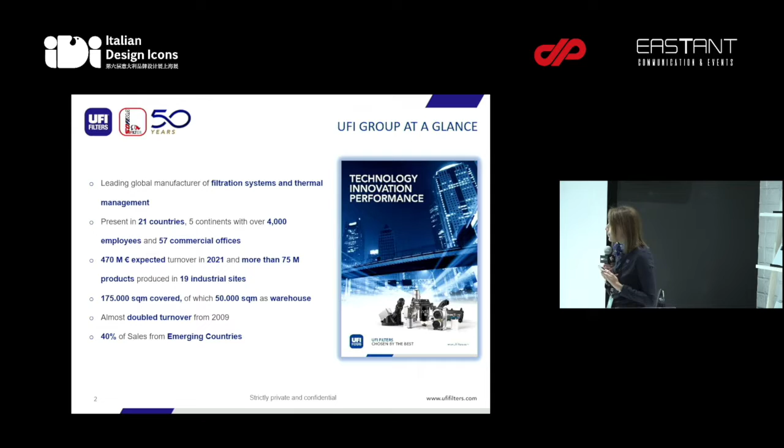Let me first of all introduce my company, UFI Group. UFI Group is a worldwide company based on filtration systems and thermal management. It was born in Italy in 1971, and now we have a presence in 21 countries, in 5 continents, and have more than 4,000 employees. We expect to close this year with a turnover of 470 million euro. And let me say that we doubled our turnover from 2009.

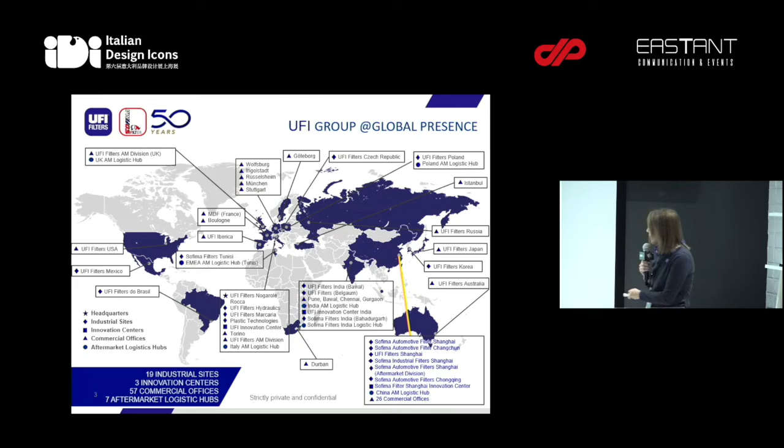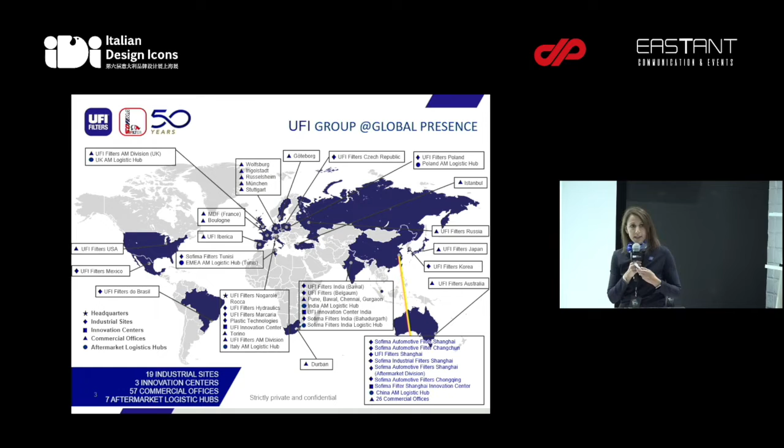This is our presence around the world. As I mentioned before, we are in 5 different continents, and we are in 21 countries. We have a big impact in APAC, and we also have 3 independent R&D centers around the world. One is in our headquarters in Italy, one is in India, and one is here in China, in Shanghai.

Let me show you our presence in APAC. In China, we have 6 production sites, and one is in Korea. And then we have a front office for our Japanese customers in Japan. We have, as I mentioned before, a very independent R&D center, able to develop our new products, with also a development laboratory that can also test our products.

Our group has 2 brands, the famous UFI Filters and also the Sofima filter brand. And we were born to be in original equipment, to be inside the car when it goes out from the manufacturing site. It can be passenger vehicles, heavy duty, and today also electric cars.

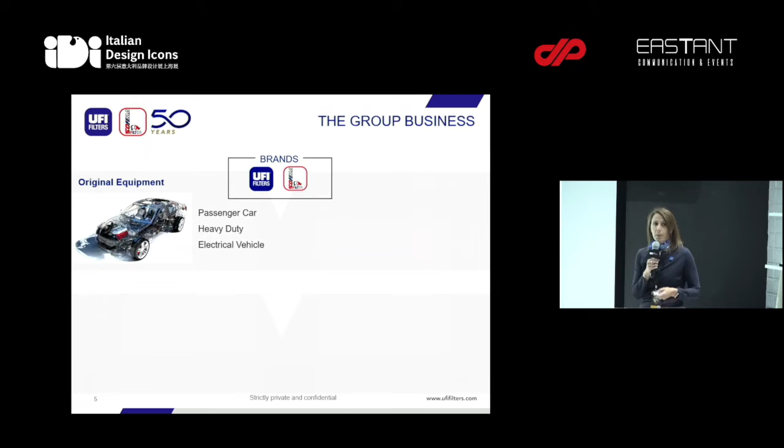But we should not forget that we also have 3 very important business units. One is the aftermarket with our own brand. The second one is high tech for racing and aerospace. Let me tell you that 9 of the 10 teams in F1 use our product. And the last one is the hydraulic division, that is more for off-road applications, mobile and stationary.

These are our main customers, which, as shown before, are the car manufacturers for passenger vehicles, heavy duty, and also the new electric vehicle manufacturers. Now, why are we here? The theme of this edition of IDI this year was the power of creativity and performance. So we are here to give you 3 examples of the meaning of UFI performance.

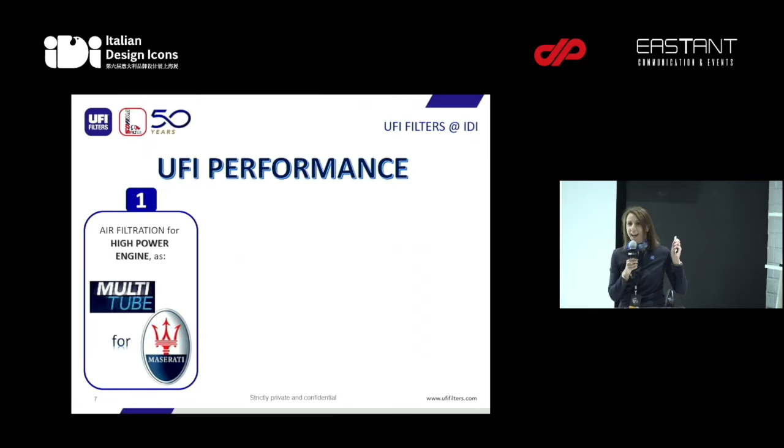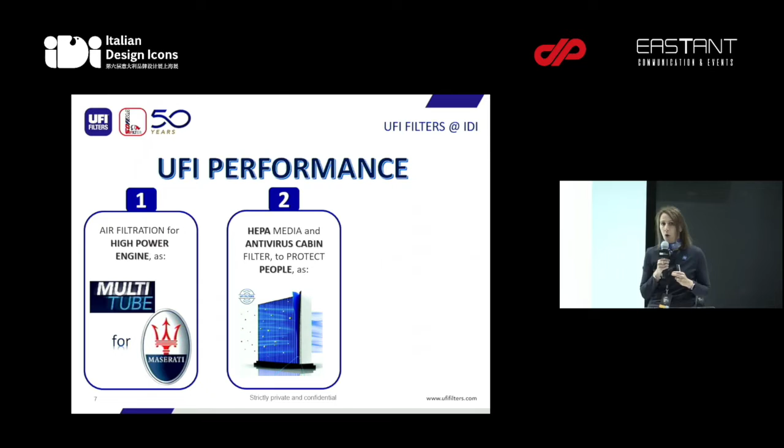The first example is in air filtration for high demanding engines, and we will show you an application of our homemade multi-tube for Maserati, for the beautiful car that is outside the building. The second example is again air filtration, but not for engines. Air filtration for people, because one of the aims of our company is also to protect people.

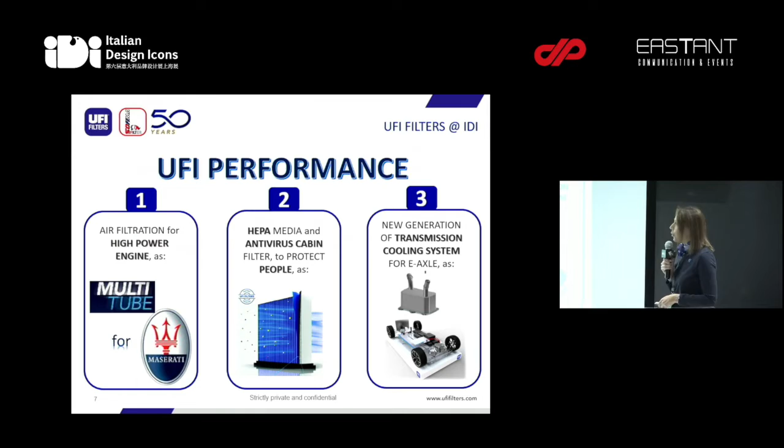And the third one, we change product a little bit. We go into thermal management, and we will show you one example of our cooling system for the new electric vehicle in the e-axle.

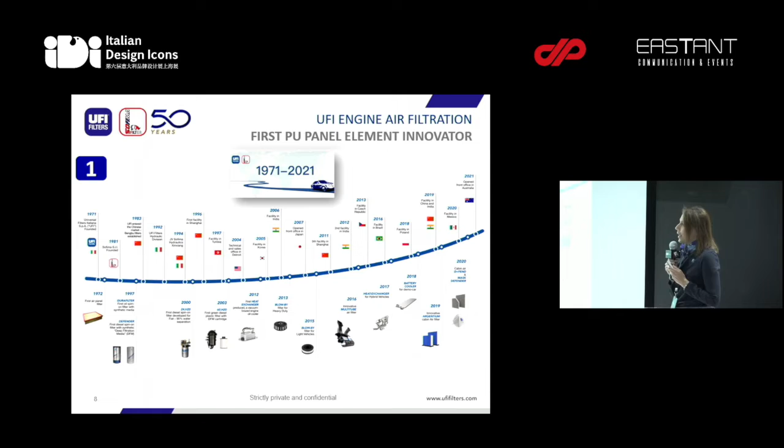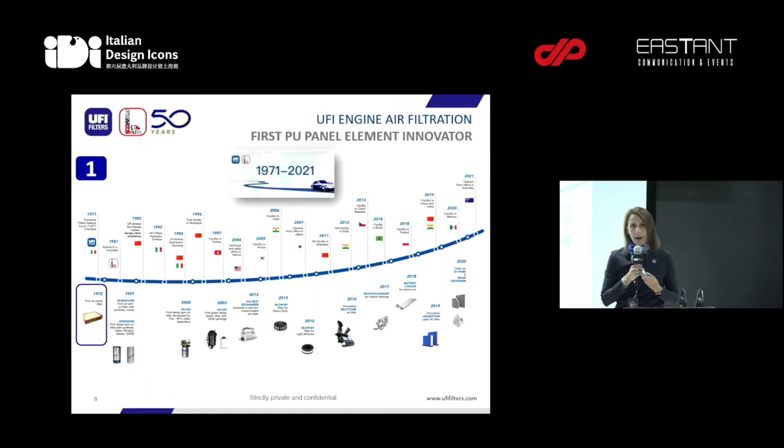First of all, let me open a small bracket: I'm very proud because this year is the 50th anniversary of my company. We were born in 1971, and in 1972, UFI brought to the market the first air panel with a new kind of sealing technology for the air box, which was PU foaming. And later on, in 2016, we developed our homemade type of air filter, the so-called multi-tube.

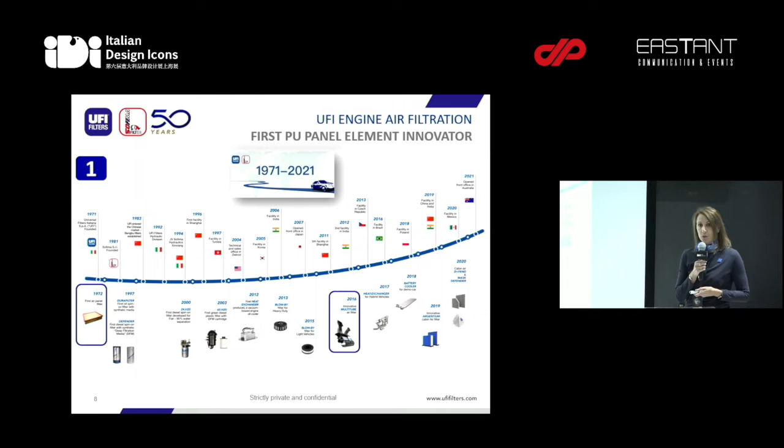UFI has developed a lot of media, made in partnership with our suppliers, and we have a portfolio of 170 different kinds of media, specific for different applications. UFI has divided these 170 types of media into 6 different categories. One of these categories is called Formula UFI Extreme, and multi-tube is part of Formula UFI Extreme. As the name suggests, this kind of media is used in extreme conditions.

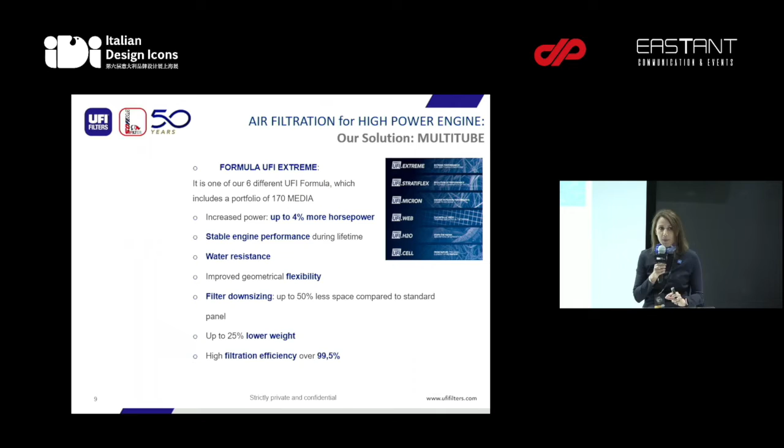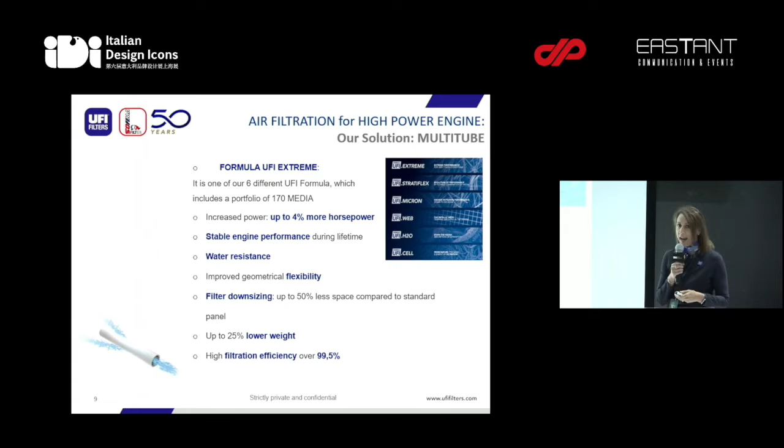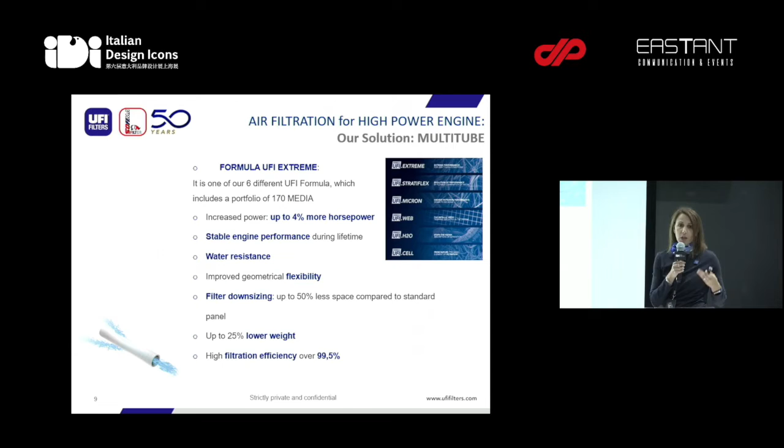Of course, it is a tube. So as you can see here, the air flows from outside to inside. And this homemade technology can give the engine 4% more horsepower. This tube produced internally is very stable in terms of performance and is very light. Compared with a traditional air panel, we can reduce almost 25% of the weight of our air system. And it's very flexible.

According to the layout of the customer, we can design our tube or a system of tubes according to the needs. And a very important characteristic is water resistance. When the air goes through the tube, the water stays completely outside. So the internal clean side is just air.

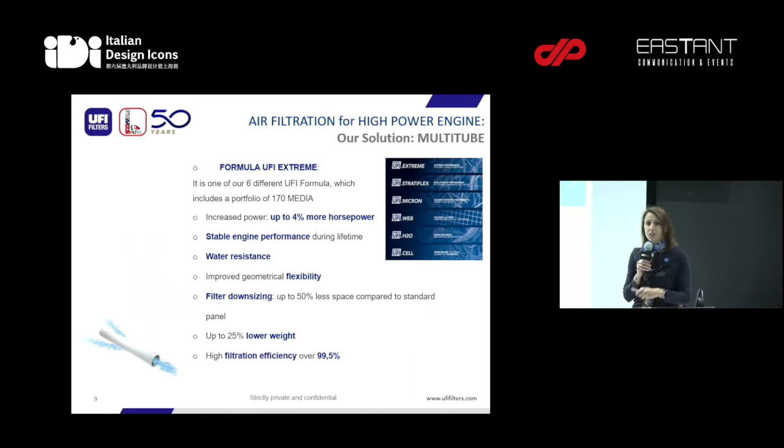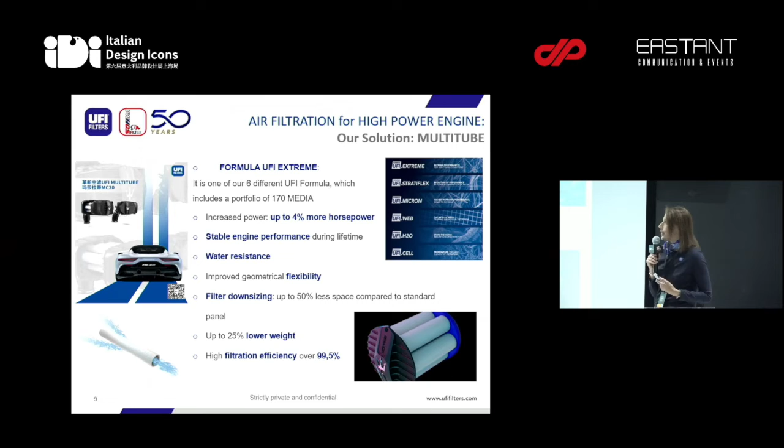Another very important characteristic is the high filtration efficiency. For this characteristic, I would like to give you some more tips in the next slide. But first of all, I'm very proud to show you the application of our multi-tube for the Maserati MC20 car. And here we have a video to show you this application.

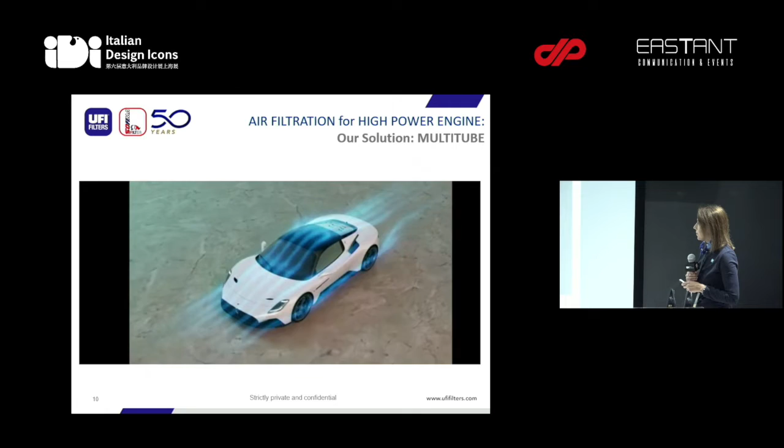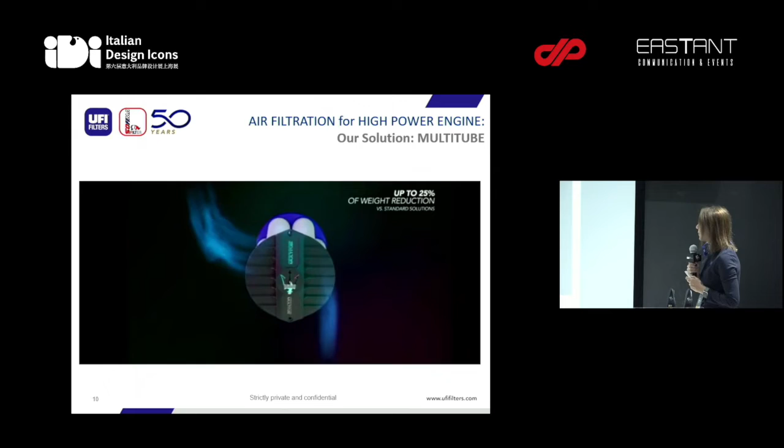So we have 2 air filters, one on the left and one on the right. So it's a couple. You can see the air flow from outside to the inside. And it's a very compact solution, completely hydrophobic and also resistant to fire.

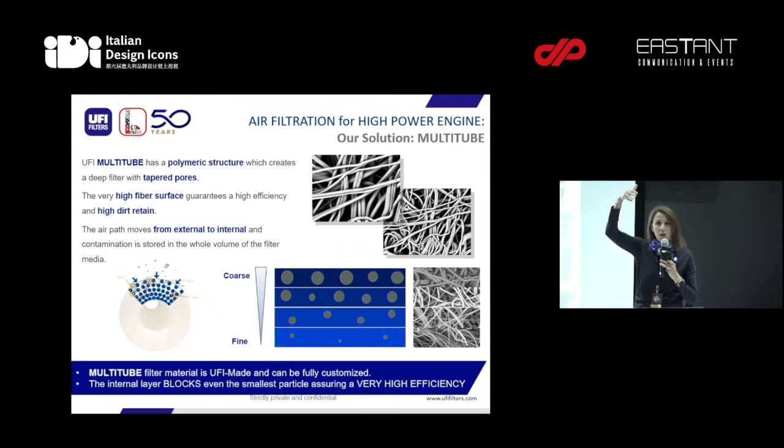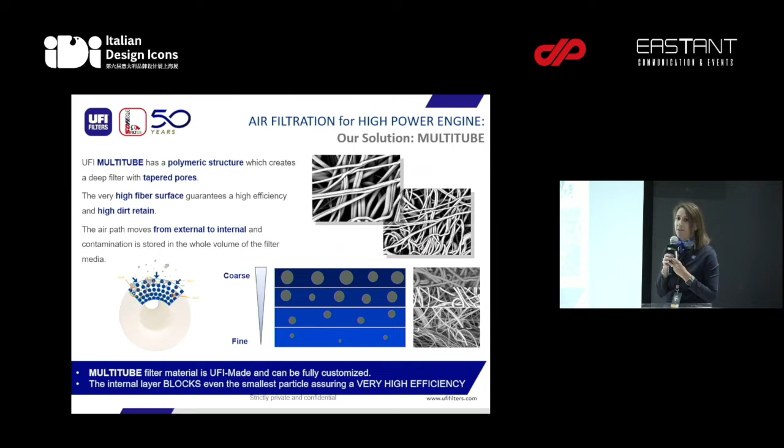So, to give you more information about our multi-tube: first of all, it has a polymeric structure. And as you can see from the picture on the left, is the volume that is working to filter the air. You can see here that we have 4 different layers, from a coarse fiber to a fine fiber. So it means that every different layer with different fiber is able to make a different kind of filtration, and so to guarantee a very high complex air filtration for this product.

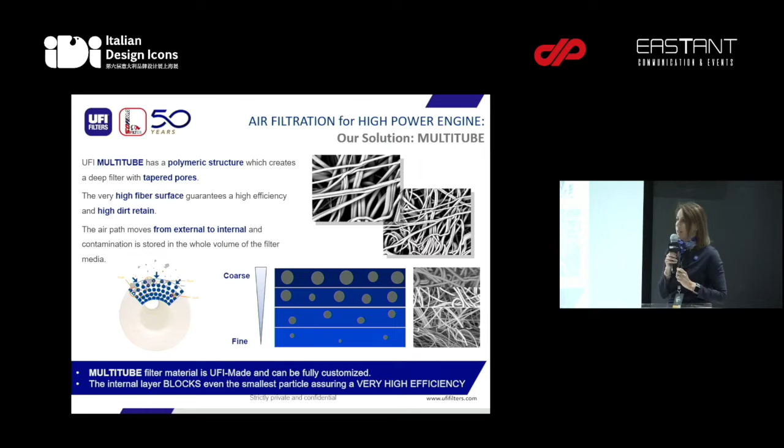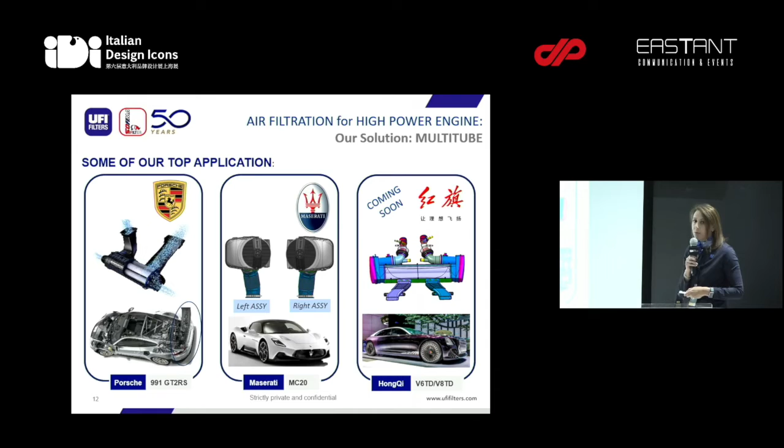Considering that these 4 layers are customized according to the customer expectation, it is a homemade product that can really follow the expectation of the customer. Now, let me also give you some other applications: not only Maserati, but also we are in the Porsche 991 application already on the market, and coming soon will be an application for V6 and V8 that we are now developing this year.

Now we move to the second example that I want to show you. We're still speaking about air filtration, but no more air filtration for the engine. We move our attention to the people. So I would like to show you some effective products to clean the air inside the cabin of the vehicle. Because in reality, more and more there is the need to purify, to clean the air inside the vehicle. Now we have pollen, we have dust, we have bacteria, and we know that we have also viruses. And now to provide a clean environment inside the car is not an option. Now it's becoming really a must.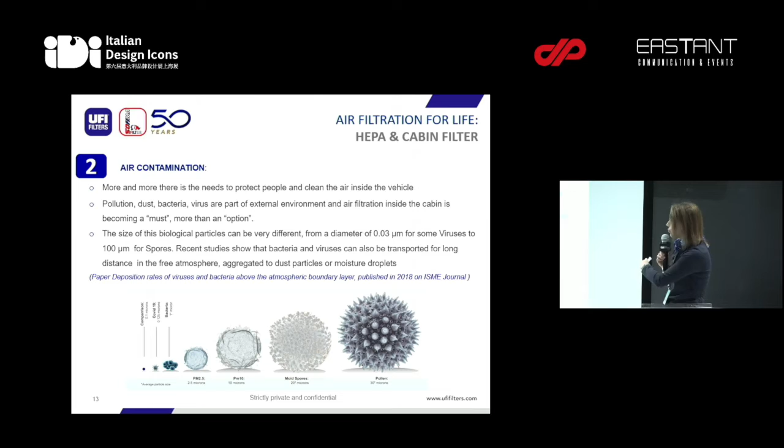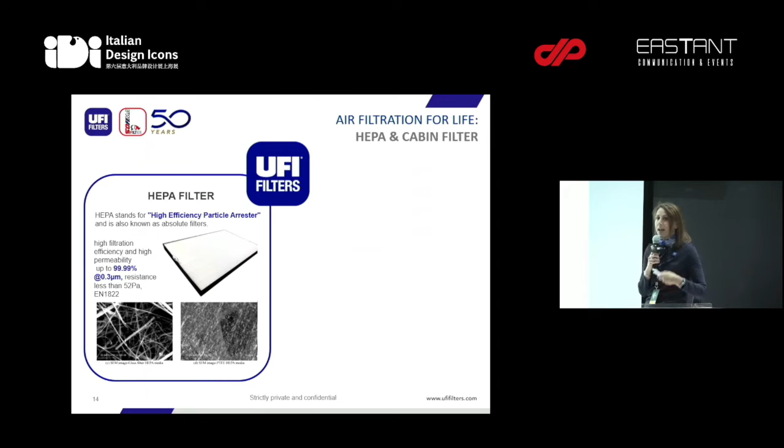And as you can see from the picture, what a filter is called to do is filter different kinds of particles. They can have, like pollen, 30 micron as size, or as virus, 0.1 micron. So the aim here is to try with different kinds of media to filter all of this range of particles. What is the reply of UFI to solve this kind of need? The first one is the HEPA filter. HEPA is a well-known technology, and we can also think that HEPA is an absolute filter because it's used in all the environments that really need very high air filtration. In fact, the performance for 0.3 micron is 99.99% filtration efficiency.

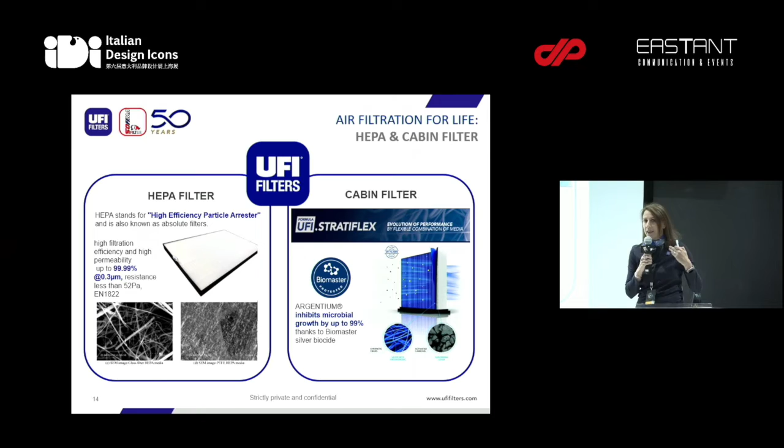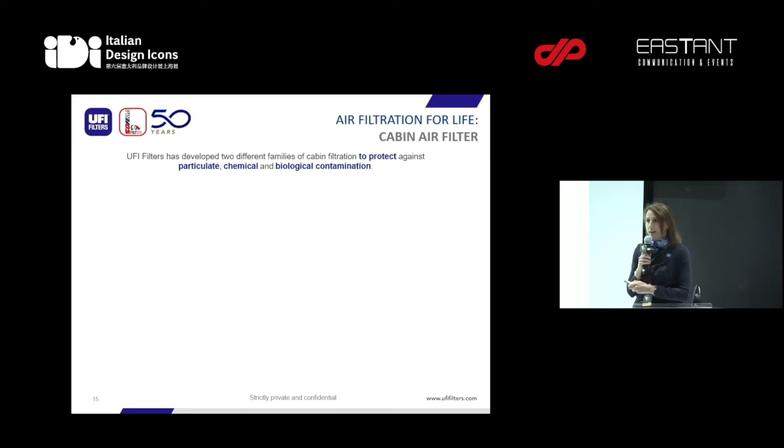The second example that I want to show you is our cabin filter. Also in this case, as you can see from the picture, we apply one of our categories of UFI formula, that is the Stratiflex. So it means a combination of different materials that can make filtration. And I will start from the last one. Again, we have different particles to be separated from the rest of the air. We are speaking about dust, bacteria, virus, pollen. The first reply that we have developed recently is the UFI filter Argentium. This is a kind of cabin filter based on a silver technology, a Biomaster technology, that with the silver technology we're able to inhibit the growth of the bacteria that may be inside the air. Plus we have a melt-blown media able to act against PM2.5 and PM10. Additionally, we have also our carbon layer that is able to absorb the air pollutant gases, the VOC, and also the NOx.

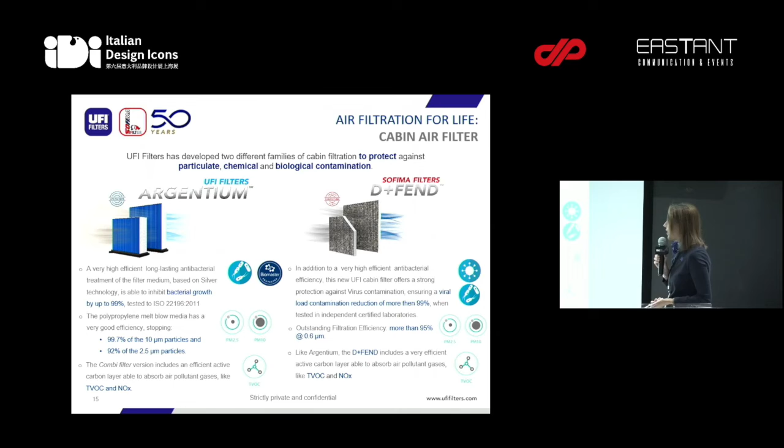Additionally, we have also another type of cabin filter that is called D+FEND, which has another characteristic. It is able, with a technology based on silver and copper, also to inhibit the viruses that can be inside the air. This technology is working together not to clean, of course, but to try to reduce the viral load contamination that are in the air. Of course, it is well performing with PM2.5 and PM10, and also has a combination of carbon layer to be able to absorb the VOC and the NOx.

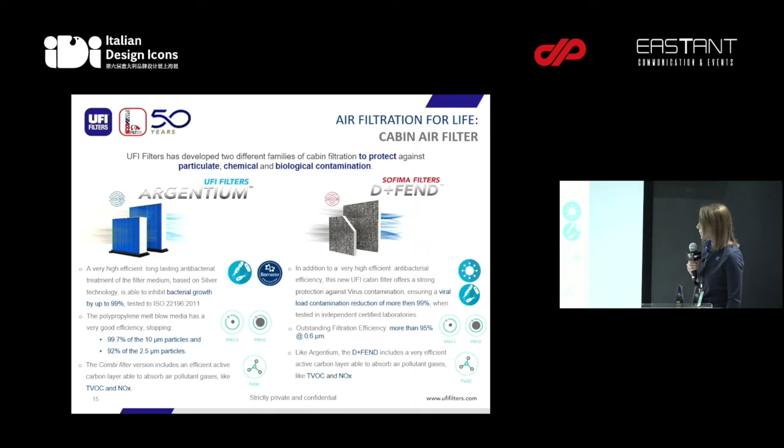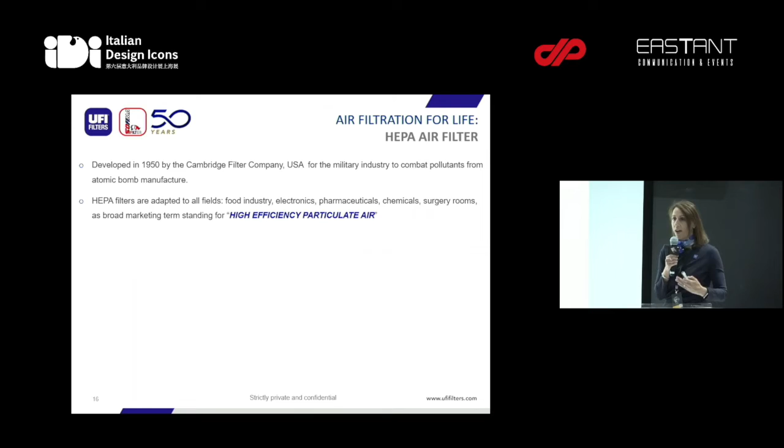If now we go to the HEPA, let me remind you that HEPA is a very old technology, because it was developed in 1950 by a US industry company for a military function, that was to combat the pollutants of the atomic bomb. So there is practically nothing to add to this kind of well-known media. It is applied today, as I mentioned before, in extreme conditions. We can think about the food industry, pharmaceutical, surgery rooms, and so on. And let me give you also some tips.

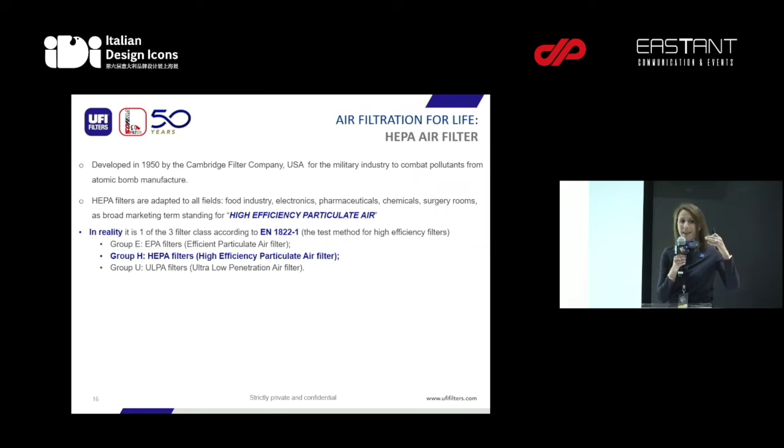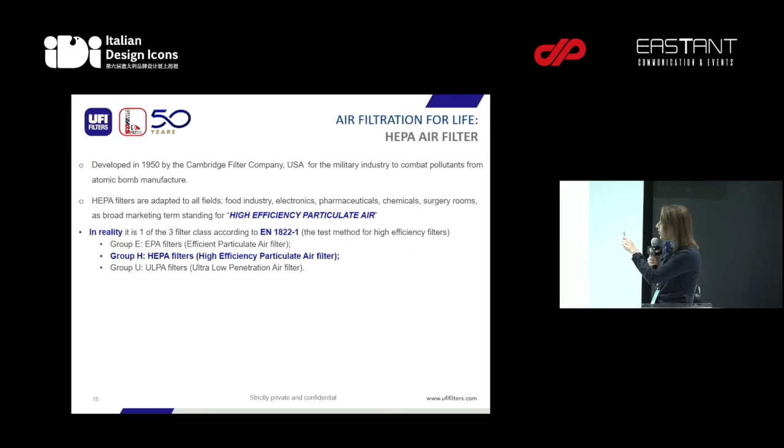In reality, HEPA is not a particular filter, but is a classification of this kind of filter according to a standard that is EN 1822, and HEPA is part of the group H, HEPA filter, high efficiency particulate air filter. In the market, when you speak about HEPA, usually we have H13 or H14 in common sense, and as I mentioned before, it is more than 99.95% at 0.3 micron.

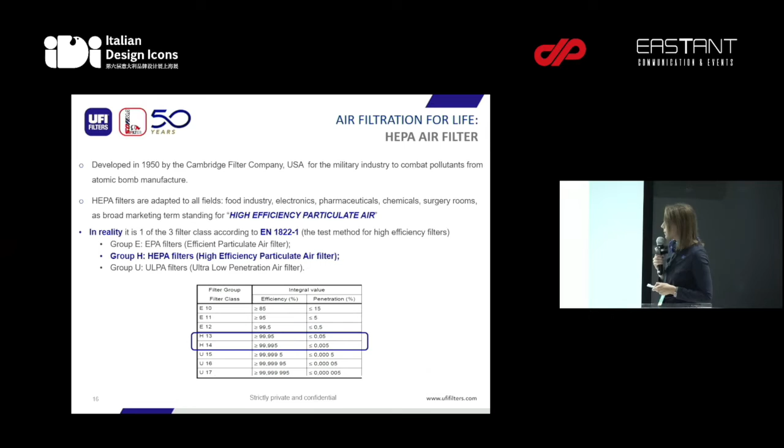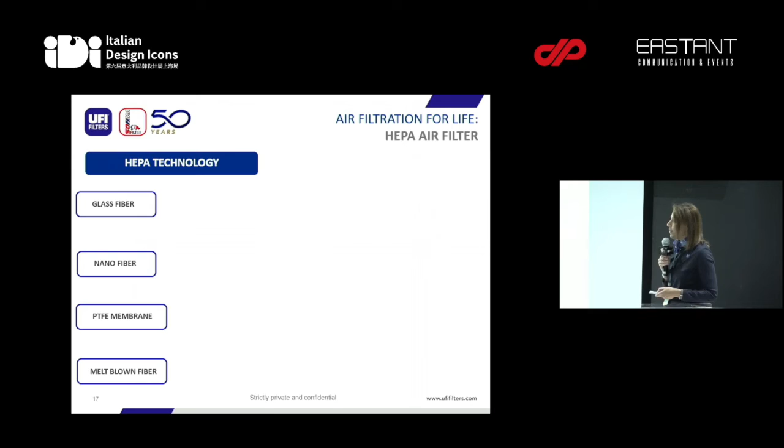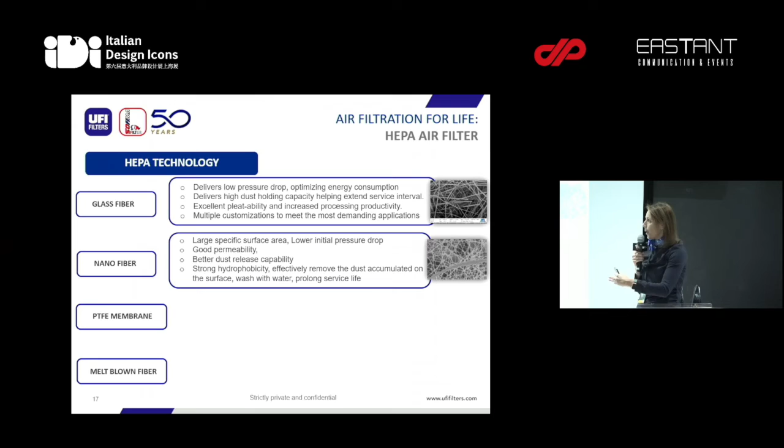Which is the technology today to produce HEPA filters? There are various. Let me mention glass fiber, nanofiber, PTFE membrane, and meltblown fiber. The first two work through a filtering method where the air is passed through the media, inside the media itself, while the PTFE membrane works on the surface filtration.

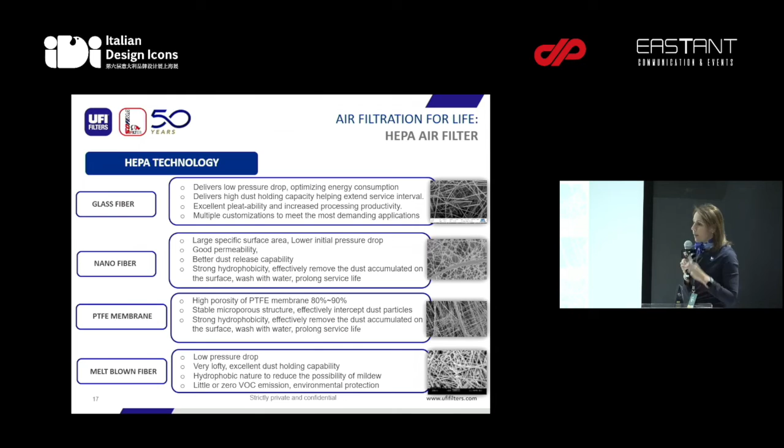This kind of material is also known as Teflon, so it's also used in other applications, like kitchen stuff. And as you understand, the surface is mainly responsible for filtering the dust and the particles to the clean side. And then we have also the meltblown solution, which practically is a filament extruded from a small nozzle at high speed.

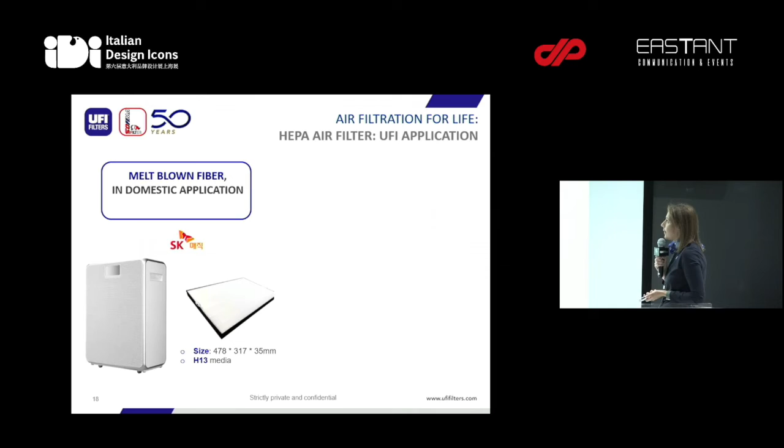Which is our application? In domestic applications we are going to implement the meltblown fiber, while for the new electric vehicles we are applying the PTFE membrane solution.

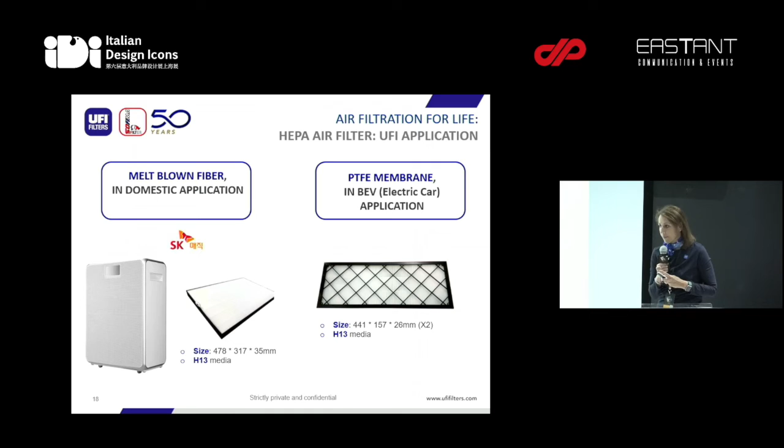Now I change the kind of product, and I'm going to example number 3. We are in thermal management, and in particular, our idea is to show you the oil cooler for BEV transmission. As you know, today all the car makers are going in the direction of zero emission as a transportation solution in urban cars. So all the car makers, even the traditional ones, are adding electric vehicles to their portfolio. But what is the target of a battery electric vehicle? To maximize range, durability, and performance, minimizing cost and weight.

Many car makers today are working towards the e-axle solution, already mentioned by my previous colleague, Mr. Chi. And practically this is a very good solution, because we have an integration of the e-motor, the transmission, and the inverter in one solution. The e-axle means that this compact solution is based on the vehicle axle directly connected to the wheels. So a lot of car makers are going this way because they can save a lot of components and reduce the size of the whole system.

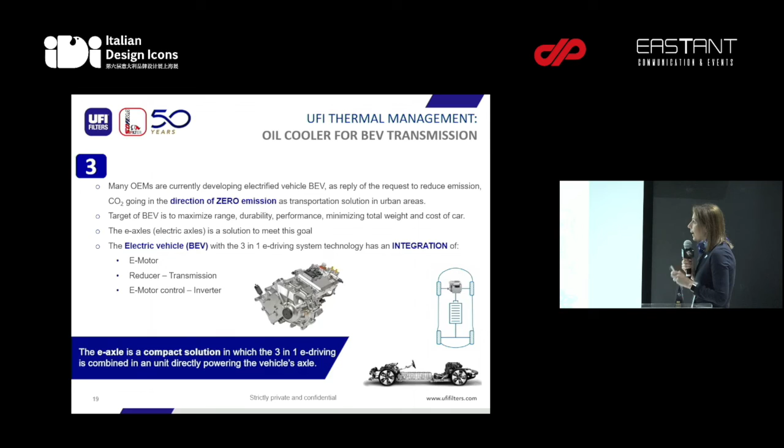But there is a problem. The requirement for an electric vehicle to work properly is to control the temperature range. And you can imagine that with a compact solution of reduced dimensions, it is very difficult to dissipate heat, and this kind of system generates a lot of heat. So one of the aims of the car maker is to manage heat dissipation, because if we don't dissipate the heat, we have degraded performance and a reduced life of the vehicle itself. So a cooling system is really needed to help the e-motor reduce its temperature when it's working.

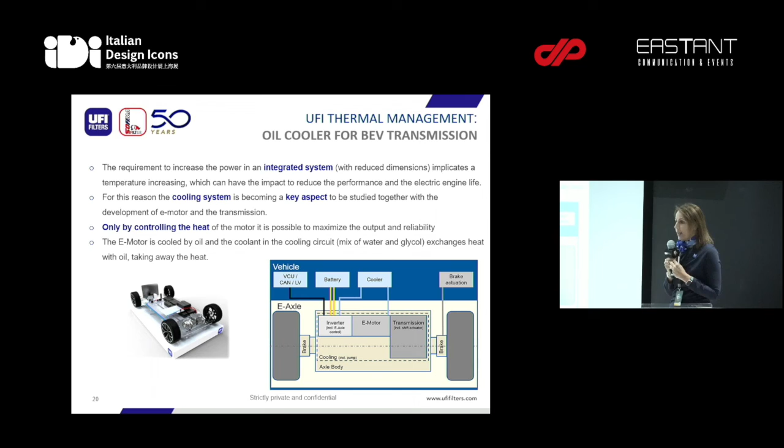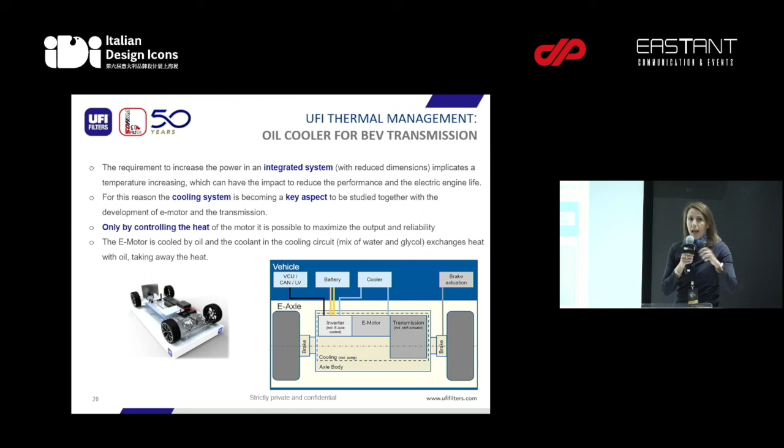So today the cooling system is one of the key aspects to be developed together with the motor and the transmission. As you can see from the picture, the cooler, our product, is connected to the e-motor, transmission, and inverter. The transmission cooler, of course, has a heat exchange between oil and water mixed with glycol to cool down the oil temperature.

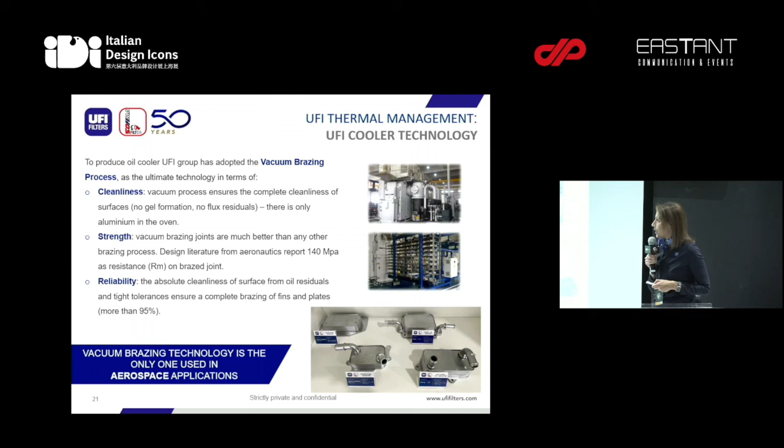How do we make our product? We have implemented vacuum brazing technology for more than 10 years, a very clean, very stable, very reliable technology, and it is the only brazing that can be used in aerospace applications. On the right side there are some of our transmission cooler products, for Nidec, XPeng, and also Renault Nissan. I would like to show you the details in this slide. This is a cooler for a rear axle transmission for Nissan and Renault that just started mass production very recently.